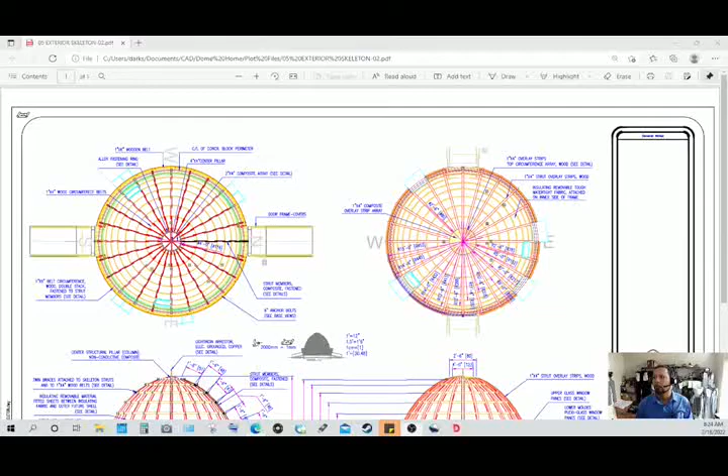Welcome back. I want to begin analyzing sheet number 5. Sheet number 5 is beginning to look at the outer structures.

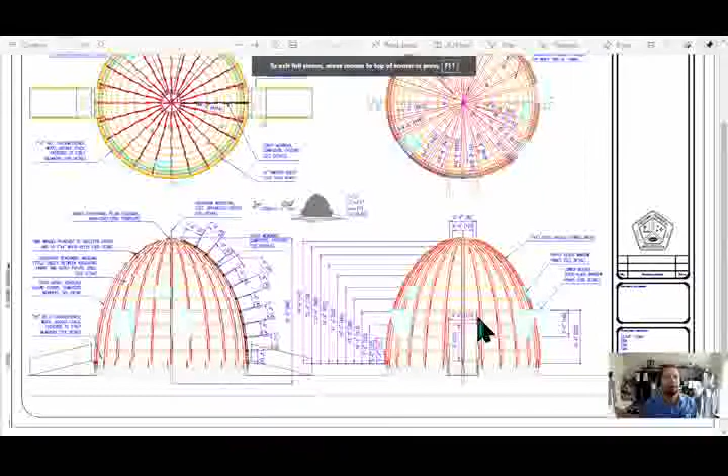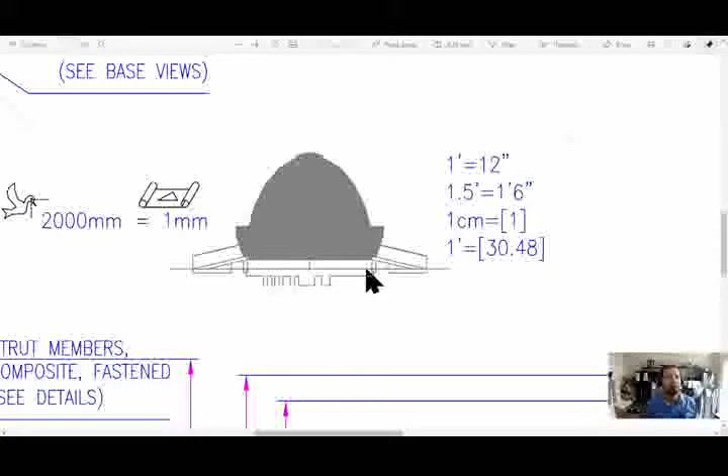The sequence is to look at the base, as we did on the last video, the foundation. Then look at the outer structure, which we're doing on this sheet. Then from there, look at the inside structures. That is the sequence that these plans follow.

It doesn't have to be like that for construction, of course. I believe you have to start with your foundation for construction. Then you can probably move to the inside next, following foundation, inside structure.

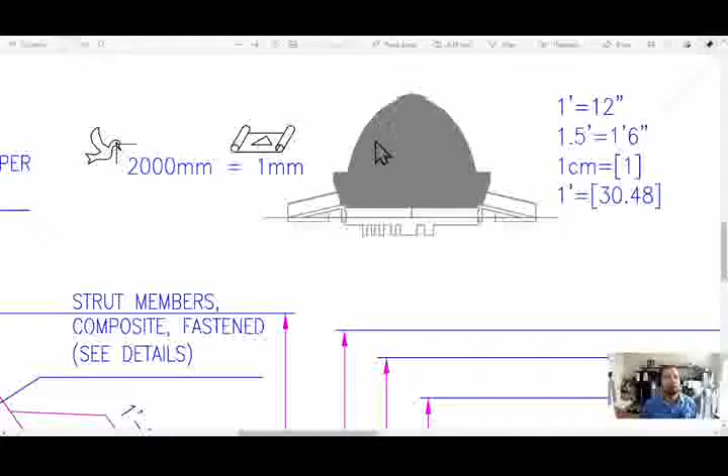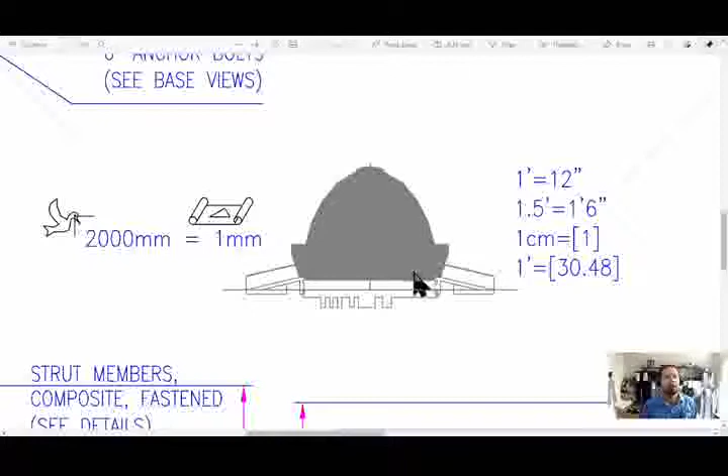The reason why I believe it's a good idea to start with the inside structure first is because the inside structure is self-erecting, or self-sustained. It doesn't need the outer skeleton, the outer structure, for support. So it's self-supporting, so you can use that as scaffolding. You can use the inside structure, which goes quite a ways up into the top of the dome, perhaps more than 3/4 of the way, and you can use that as scaffolding and platforms to build the outer structure.

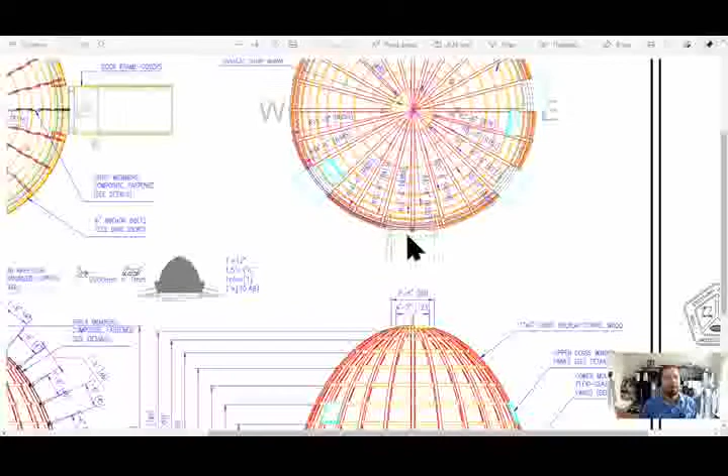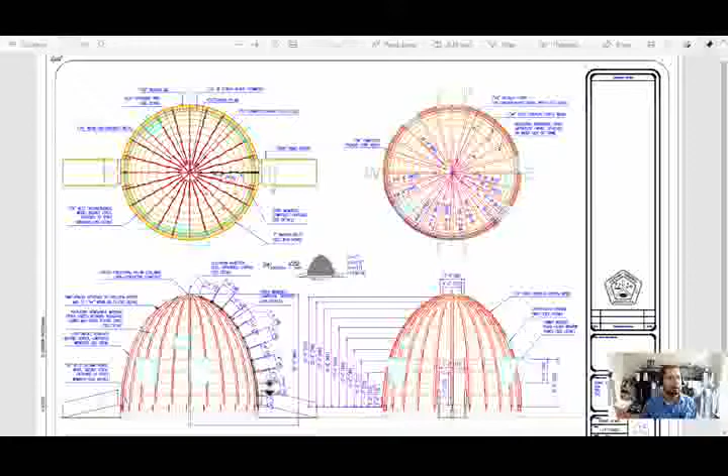But the way it is right now, the base plan is followed by this one. I may change that shortly here in the future, and we'll describe this sheet number 5, which is the exterior skeleton. It's called the exterior skeleton, which is basically the name I gave to this structure here.

This is the exterior skeleton in its finished form. Of course, it doesn't have any paneling or any of the covering it would have as a finished project. But this is the actual exterior structure, as finished, as far as the structure is concerned, the skeleton. We'll go over the various parts as we move forward.

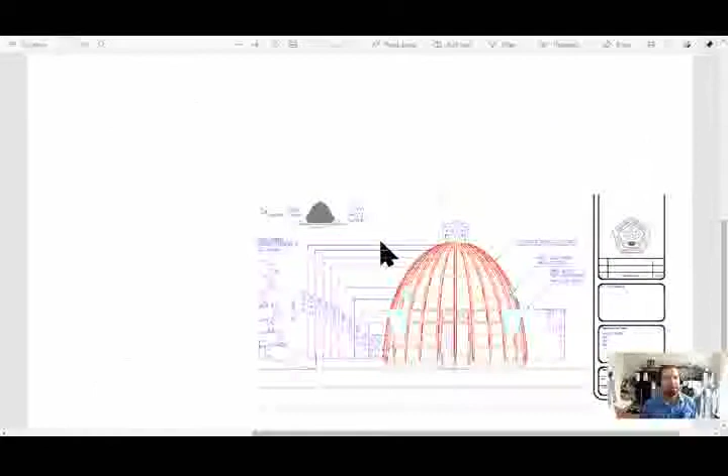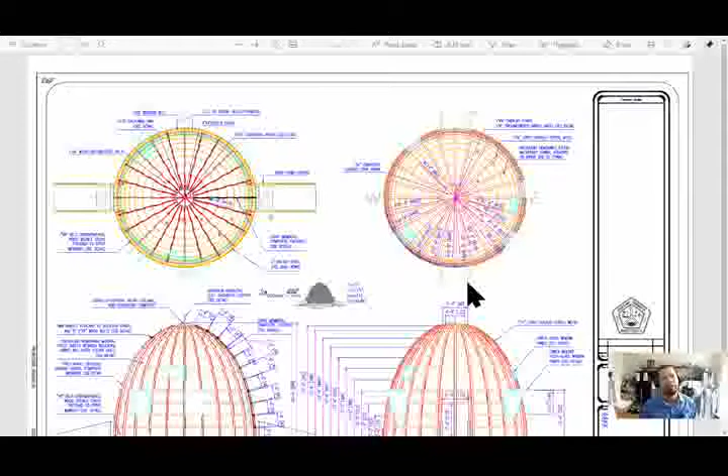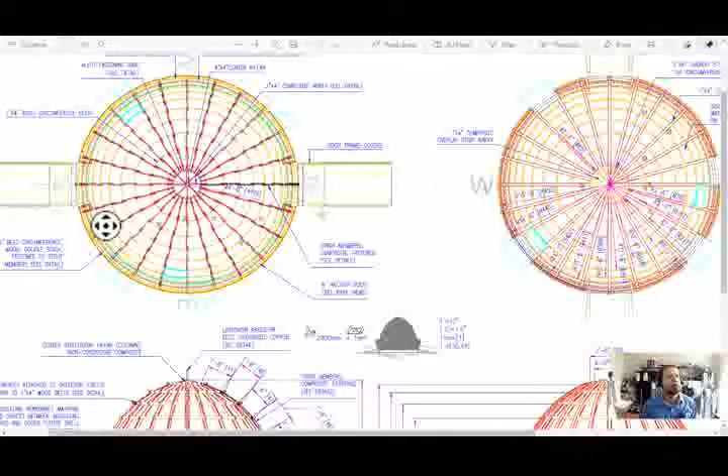We'll begin with this top view. I have again the same layout as the last sheet: 2 top views, one top view from east to west, south to north, and then rotate it 90 degrees to go from west to east. And then this would be south to north. Again, the south side being the entrance, north side being the exit.

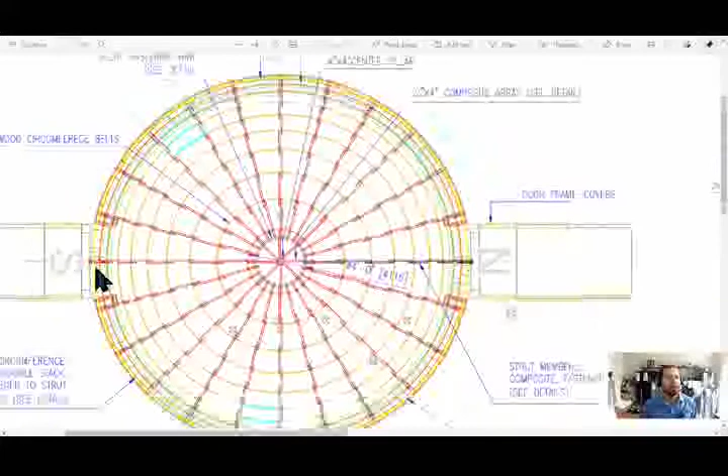As you can see, the structure is sitting on top of this circular block array, as shown in the last plan. And it is basically an array of arcs that go around a common center, being the very center of this one column, this pillar. And as you can see, the arcs are attached in the center by what I call struts.

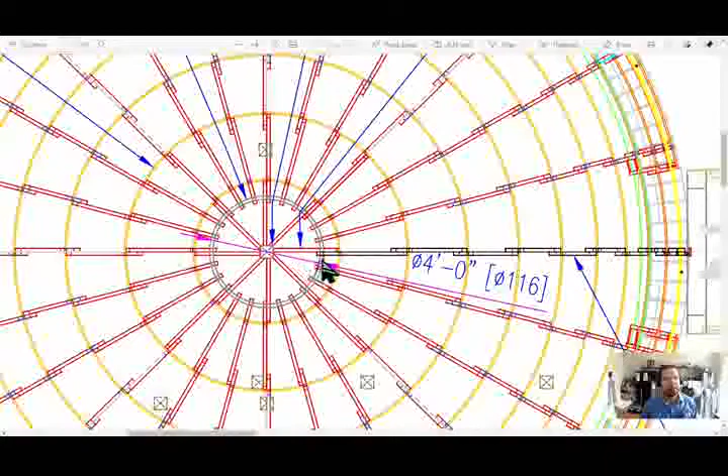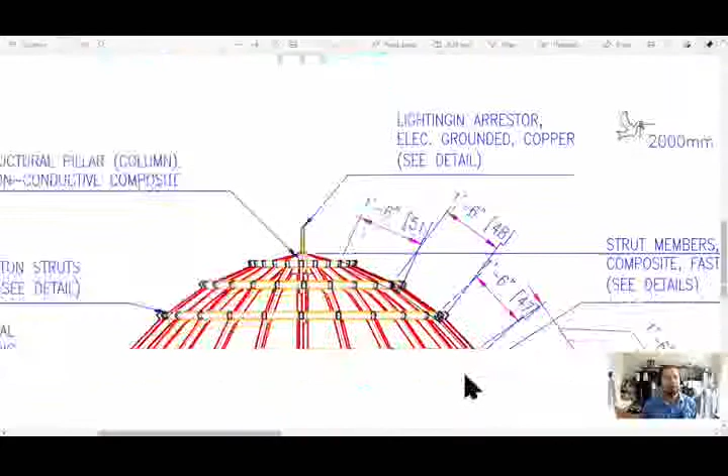These are pieces of lumber, 2x4. They're designed to be the size of a 2x4. They don't necessarily have to be lumber. Actually, these here in the center are designed to be a material other than lumber, like dense composite. And these can be lumber, but can also be composite. These are nothing but different size, cut-to-size struts, pieces of lumber, rectangular in shape. They're not curved at all, each one.

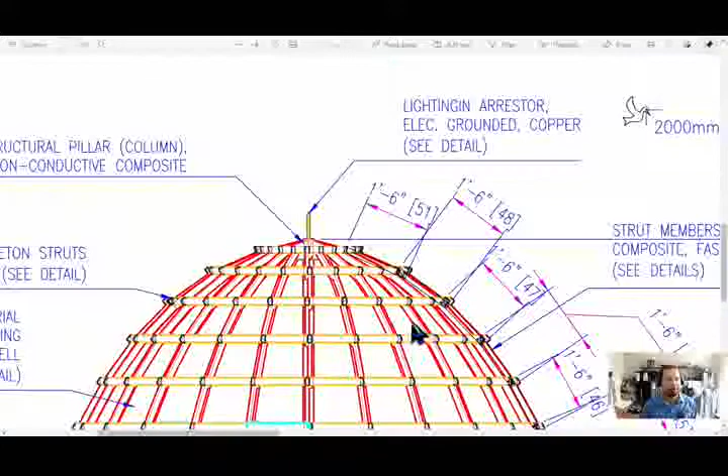These are the dimensions for them, and they are basically put together, arrayed, and attached in a pattern using 4 bolts at each attachment point, as depicted here. There will be another view with a larger, more easily seen pattern for attachment.

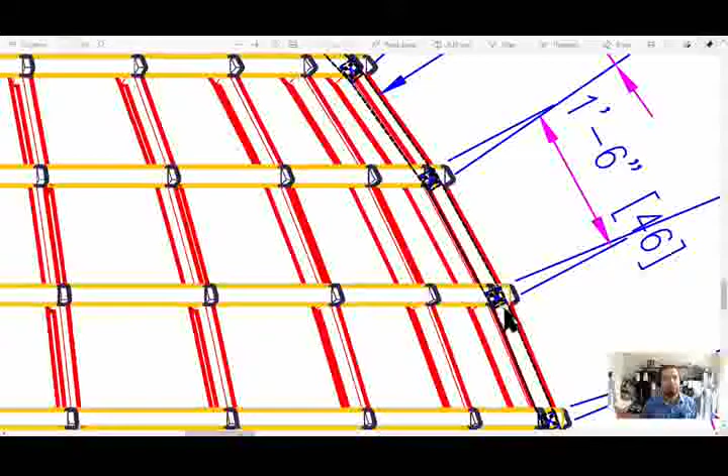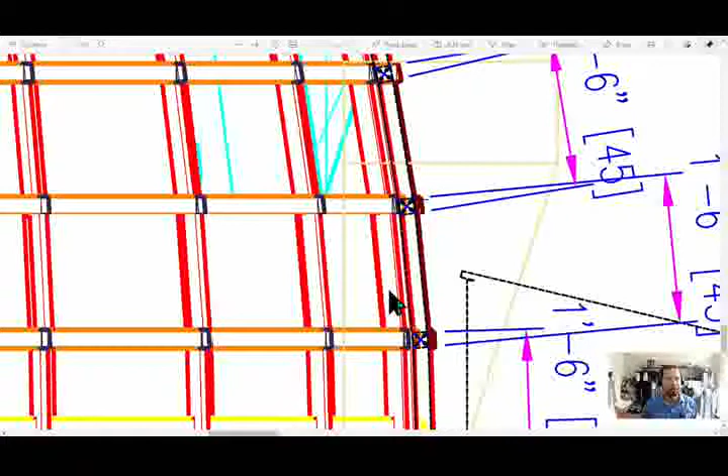So as you can see, these struts, these pieces of material, are rectangular in shape. They're just attached to each other using bolts and perhaps sealant, some sort of cement or bonding paste, for a more secure attachment. And this will be the same for every arc. Every attachment point will be the same.

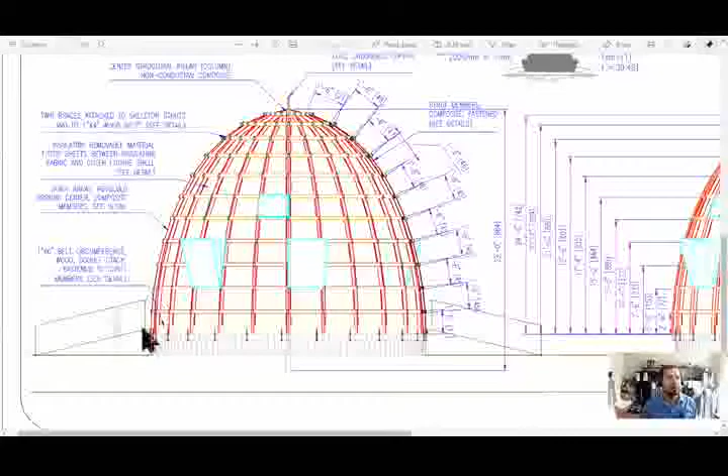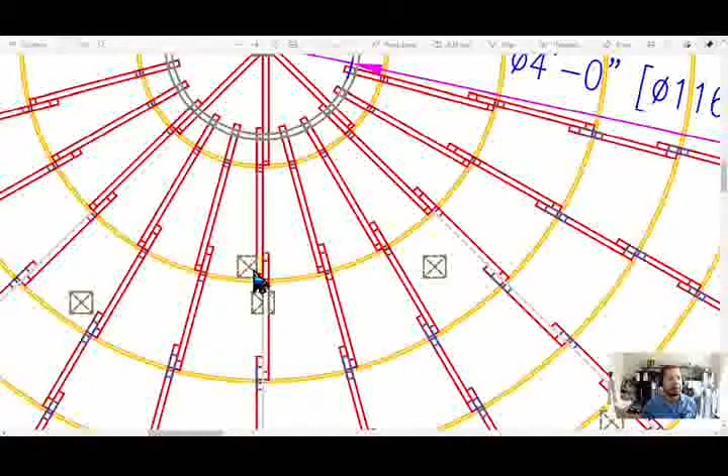Okay, and that is for the arcs. So that is the overall structure of the arc, which goes to the other end as well. As you can see, this arc going from east to west begins here on the base, comes up. It is perhaps supported here and here by these 2 columns.

Then it keeps going here, attached to the center column, and continues. So it is very much separated by this column. These two pieces don't directly touch, but the load is shared with the column for each one of these arcs.

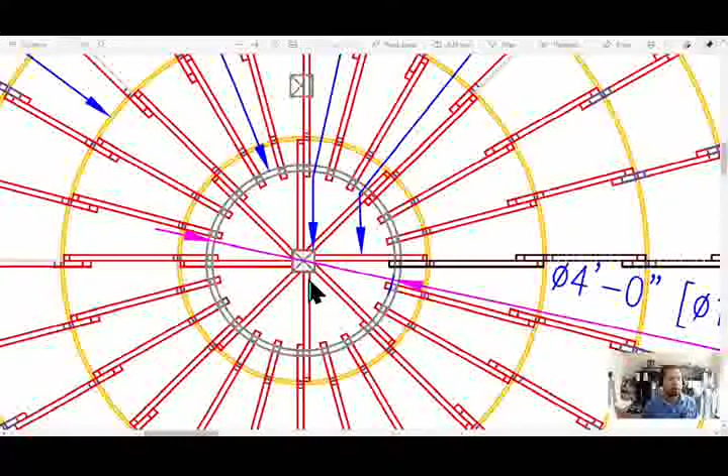It is securely attached to the column using braces and bonding chemicals, paste, etc. That will be shown in detail on how they will be attached, what the attachment points are, and the recommended fasteners to use, whether it be bolts - most likely bolts - or deck screws, or a combination of that with brackets and braces, and of course with sealant or bonding material.

As you can see, these arcs in between, the ones that come all the way to the center column, are cut, or they end right there, like these two. They cannot all come to the center, because that would overcrowd this area, making it impossible, or very inconvenient and non-practical, to attach to this center column. If we came here, it'd be very difficult to securely attach it, especially if you come in with this one as well.

So those two in between will end right there. Only 8 will come into the center. The rest will remain this far, only secured and attached to this alloy metal ring, shown in gray here.

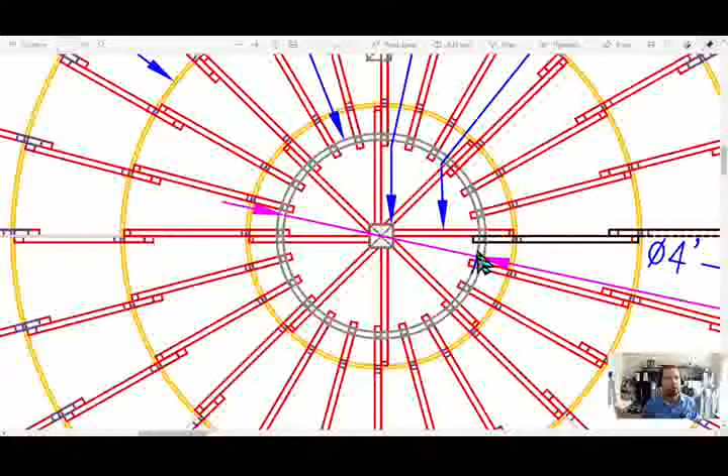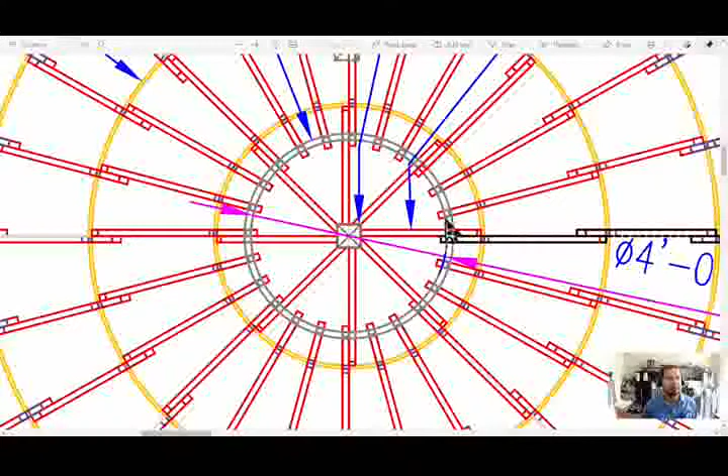This ring is manufactured with a series of cuts and holes to fit and secure every single one of these struts. They will share their load not only among each other, but indirectly they will share the load with the center as well. The load will be shared through these struts that are attached to the center, through the ring, when securely and tightly attached.

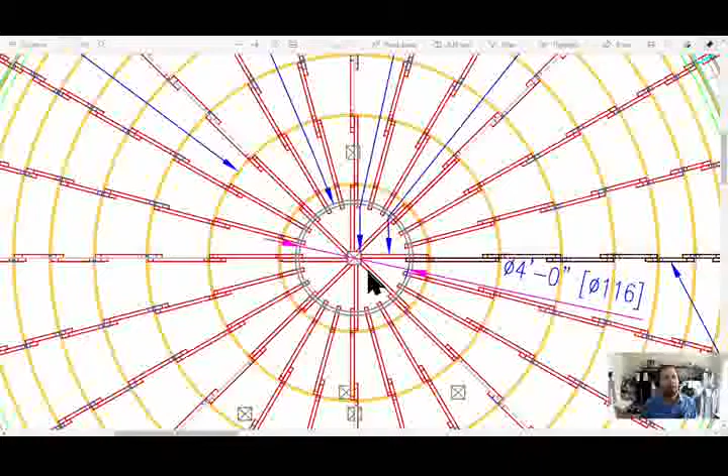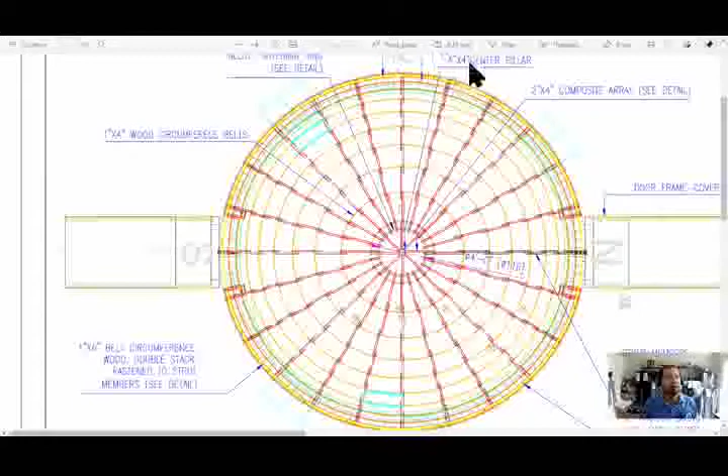I've given dimensions for some of the things here. This is not a 4x4, this is more like a 6x6, or 5.5 inches by 5.5 inches. That needs to be corrected. This dimension here is not correct.

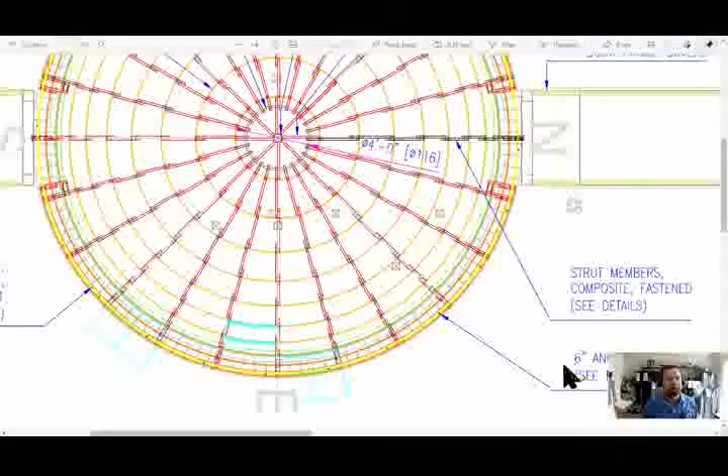Very brief and generic descriptions are given for the structure. You can see the anchor bolts here. They're not 6 inches, they're more like - I believe I said - 16 inches or 18 inches.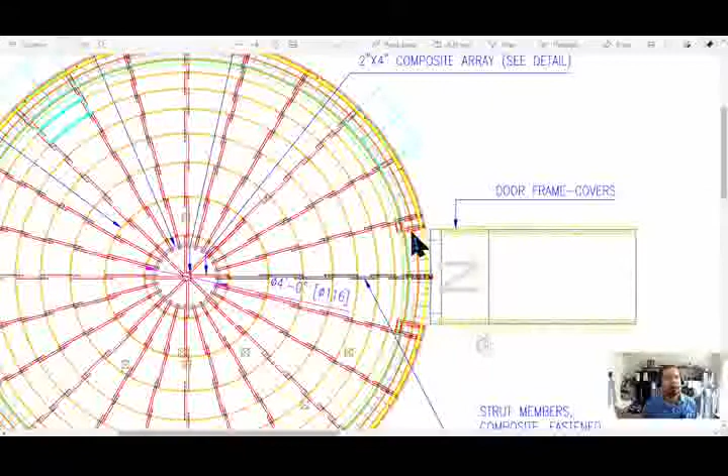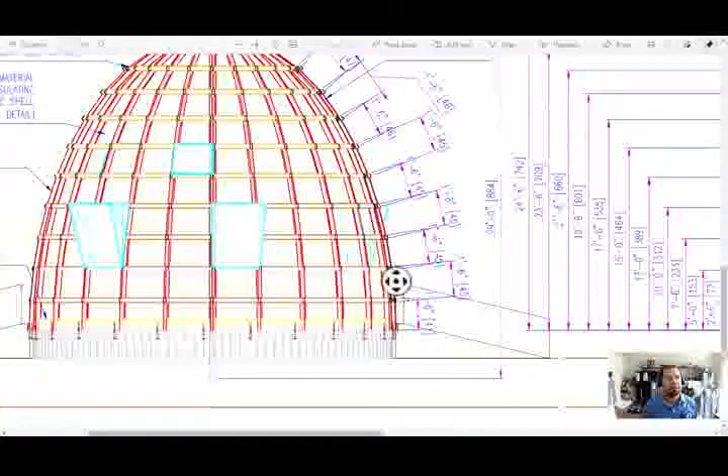Also, these being the entrances, have these extra struts here that go all the way to the top of the first level, or the bottom of the second level, as seen here. Perhaps you can't see those there, but as you can see, there's that door frame that I described earlier.

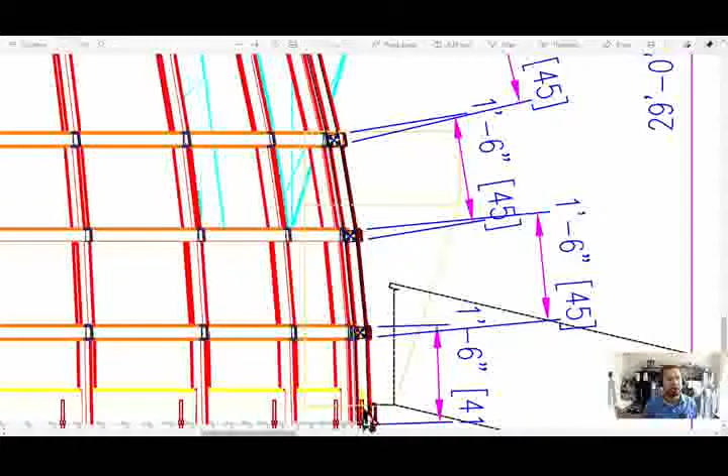It is an entire piece that goes inserted, basically, to put a door here. So there's a double structure here, strut structure that goes 1, 2, 3 struts high.

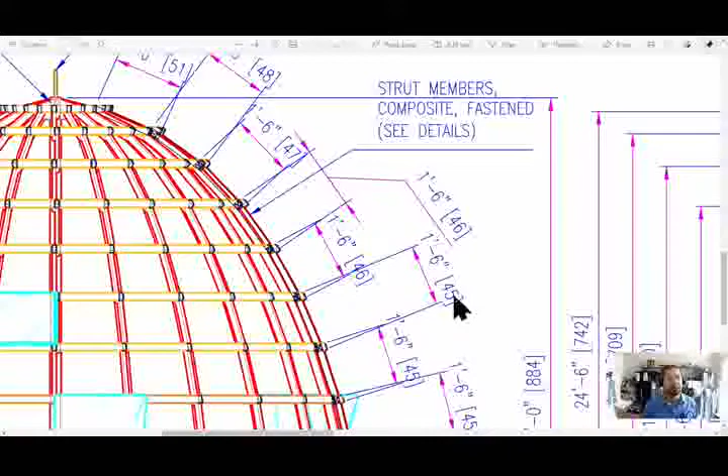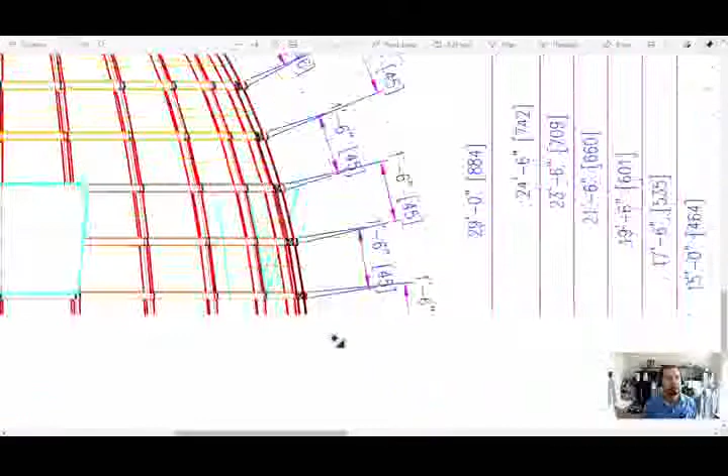Again, I show the dimensions of each strut, very close in dimension, perhaps identical. They show as 45 centimeters, some show 46, 47. I believe these ones are longer. Yes, they're not identical - these are longer, 51 centimeters, 48, 47. This one here is 41. So yeah, I would follow these dimensions.

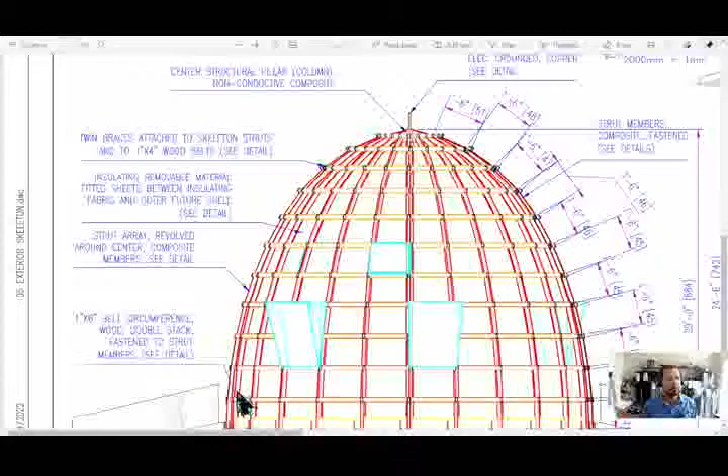Here's a description of some of the major items here. I described the 1x6 belt circumference made of wood. It's a double stack - there are 2 of them, as you can see, one on top of each other.

I'll describe some of the other things, such as an insulating material here, or fabric that goes right inside of that.

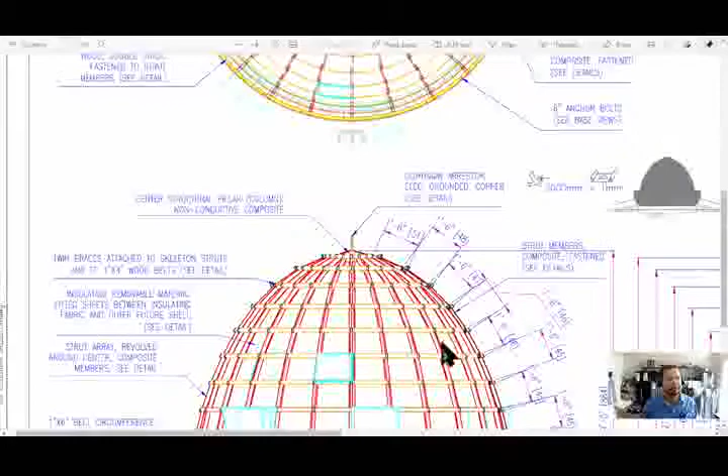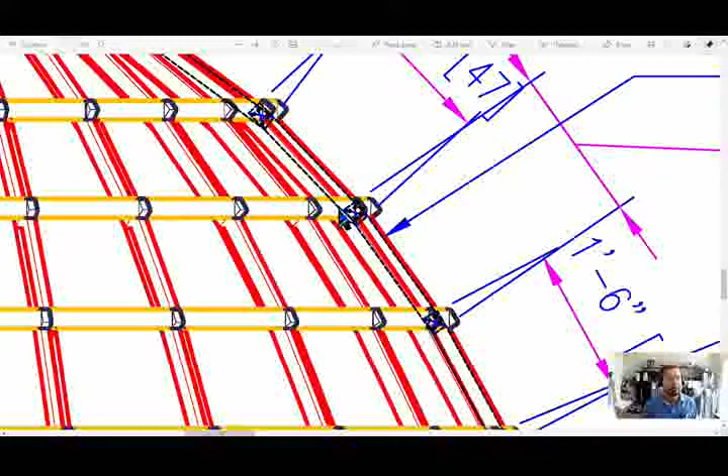And the way these struts are secured, there will be another sheet that shows that with a lot more detail. But just to begin explaining, they are attached to these horizontal belts using these triangles, what I call triangular braces. What these triangular braces do is attach this horizontal belt to the struts at each point, at each one of those locations where they come together.

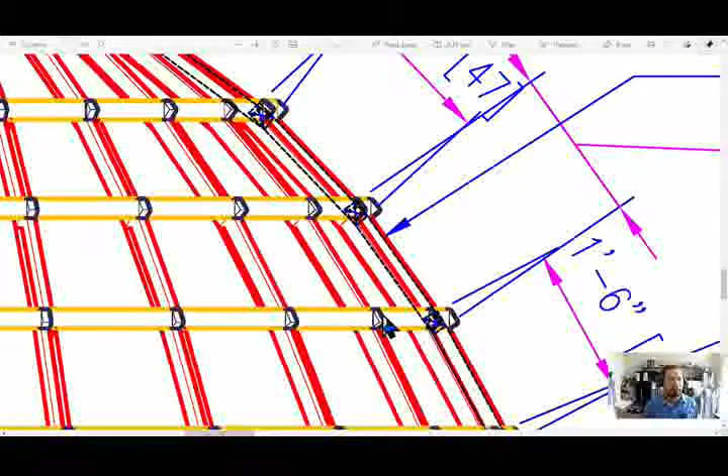They also provide an attachment point for the overlay strip, shown right here. These overlay strips, as you can see, need an attachment point, so they cannot go straight on the strut - they would not be curved like I'm showing them. For that, they go attached at each triangle.

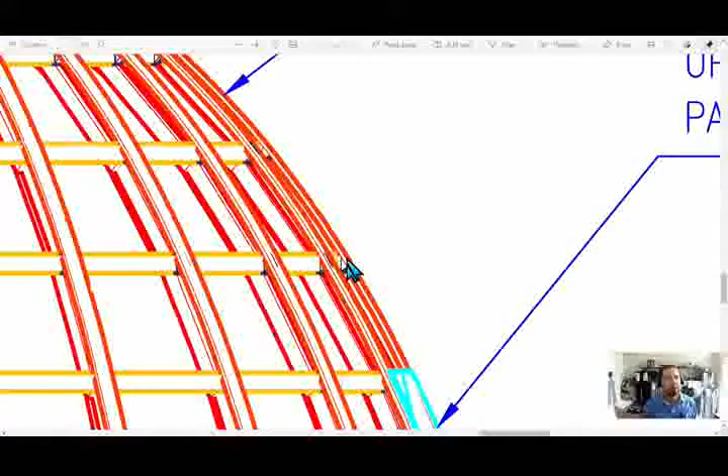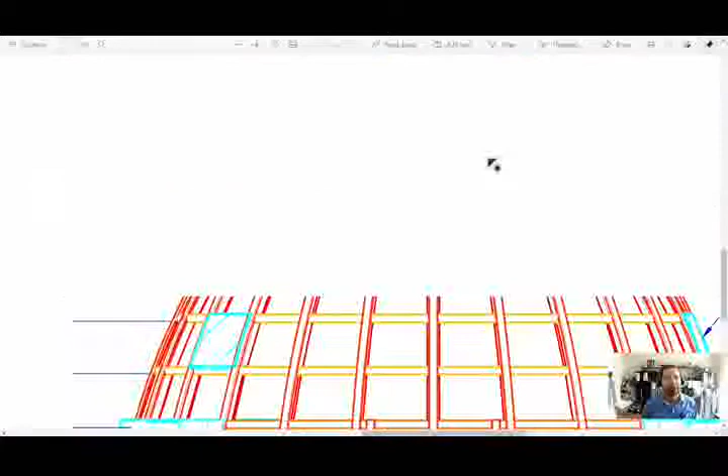Here, here, here, here, there, there, there, and there. These triangles are all of a specific size dimension, which I will detail in another drawing coming up.

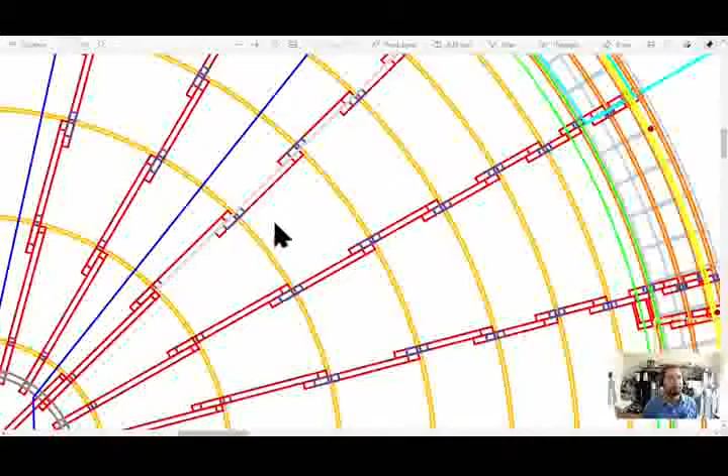Moving to this view, this top view shows the difference between that view and this one: this view just shows the struts and the triangles, the braces. This view here goes further and shows the overlay already installed, and the belts. The belts are shown here as well.

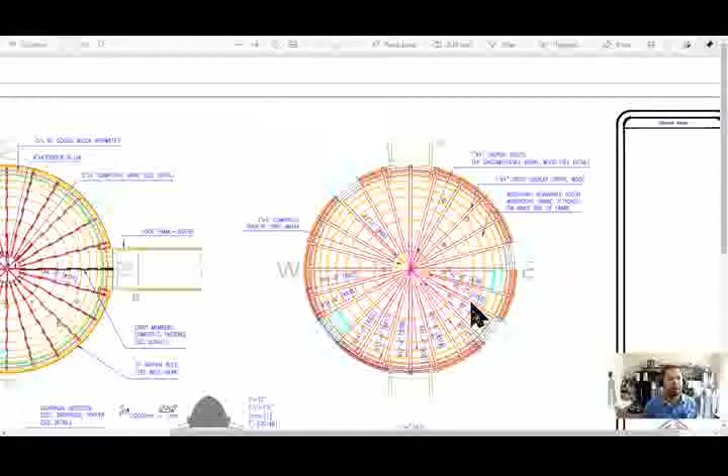These belts each are designed to be of lumber wood, 1 inch by 4 inch.

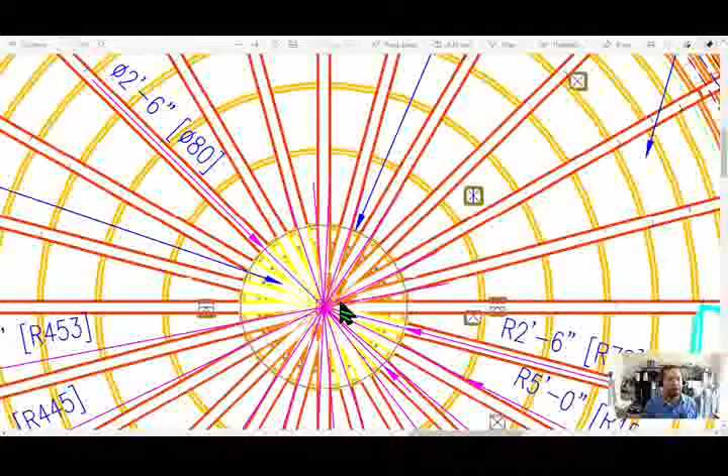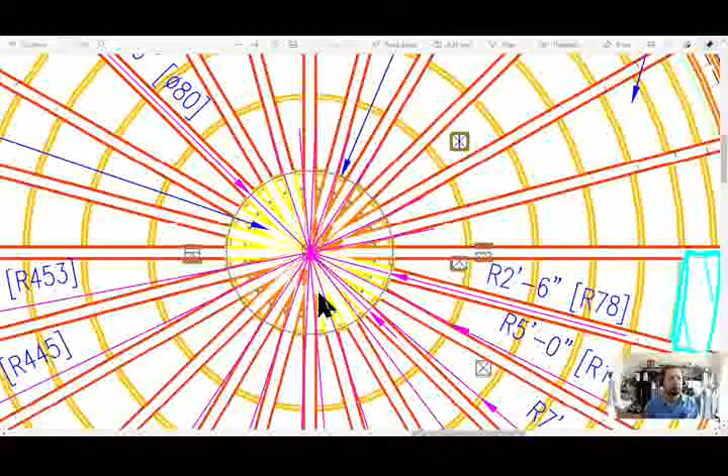This right here is not necessarily a continuation of these, but it's a manufactured cap that has to be manufactured basically to continue these overlay strips all the way to the center and provide a cap that almost perfectly matches to where these come in at.

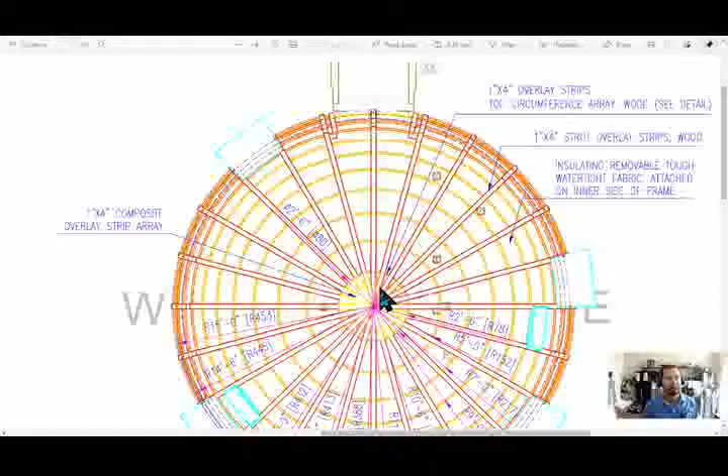I will show that with a bit more detail in another drawing. I do show some descriptions of that. I call it a 1x4 composite overlay strip array.

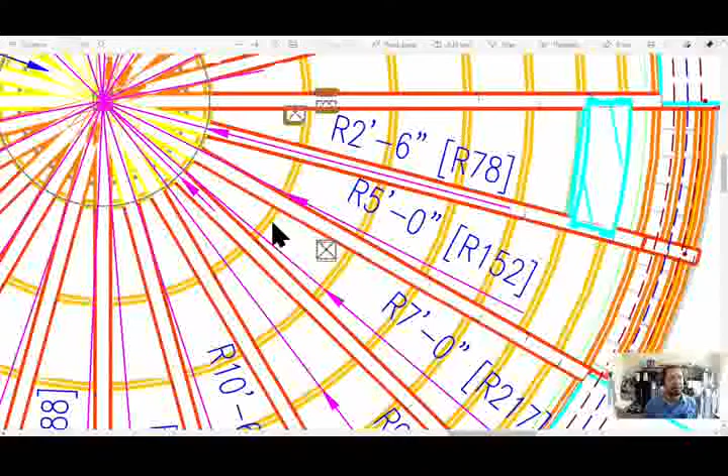I show some dimensions of each of the circumferences, like for these 1x4 rings or belts. I do show the radius for each one of those, radius from the center, which would be the center of that column.

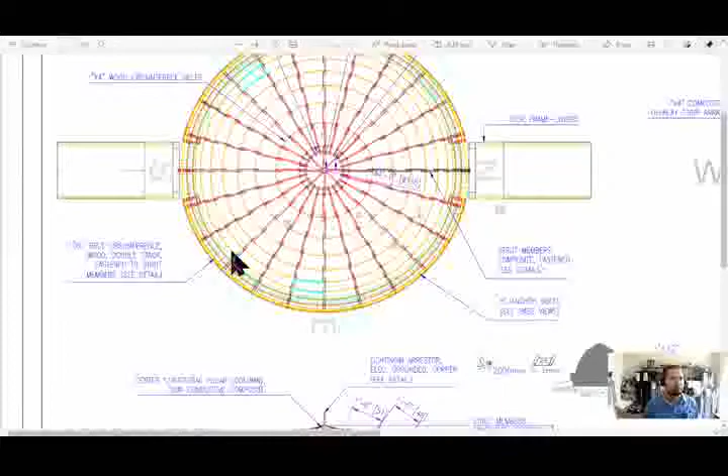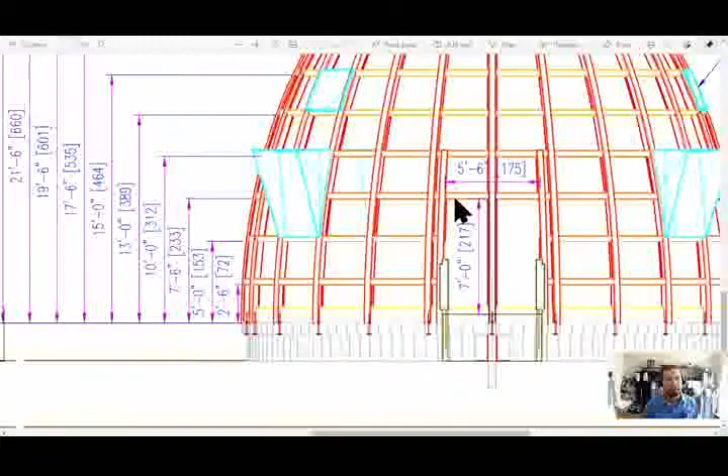And those are the main dimensions. Also, I do show the heights to each one of those, to the bottom of each one of those belts. These 1x4 belts, I show the heights, the height to there, which basically is the height of the door frame.

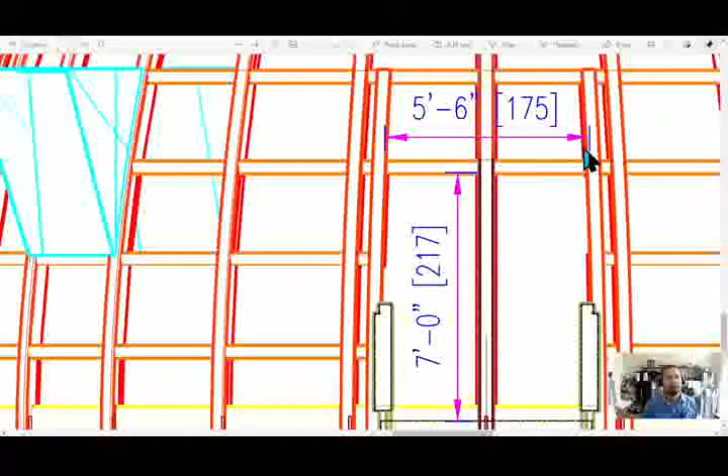And the width of the door frame, which I believe, this may be mistaken, I believe that to be about 6 feet, if I'm not mistaken, but it may very well be different, so we'll have to verify that.

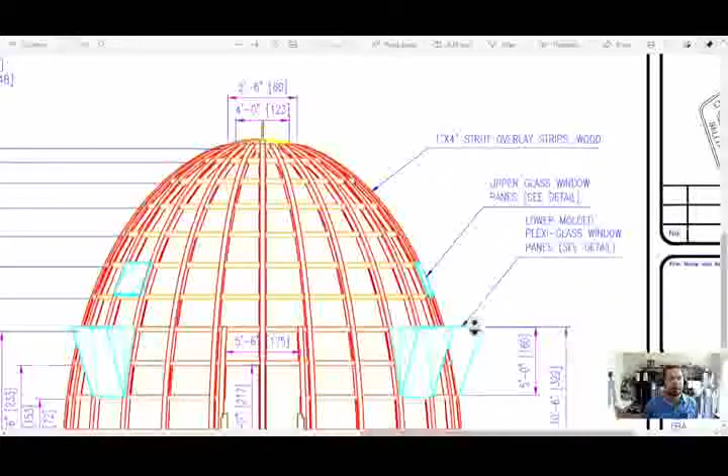Some more dimensions given and more descriptions, including the window pane and the window here, which again is designed to be molded plexiglass. This is designed to be glass.

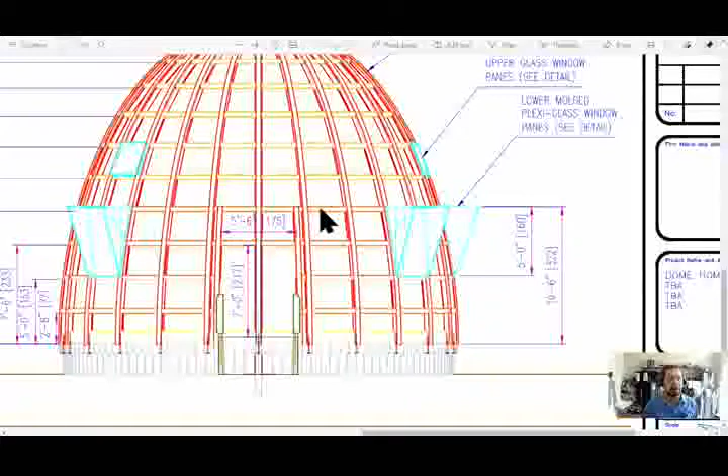The height of the window is 5 foot. The height from what I believe to be the block, the top of the block level, to this is the top of the first deck, first level.

Again, the top of the blocks is not the floor line. The floor line is about 6 to 6.25 inches up from that, probably about the line where this is right here. That's the floor level.

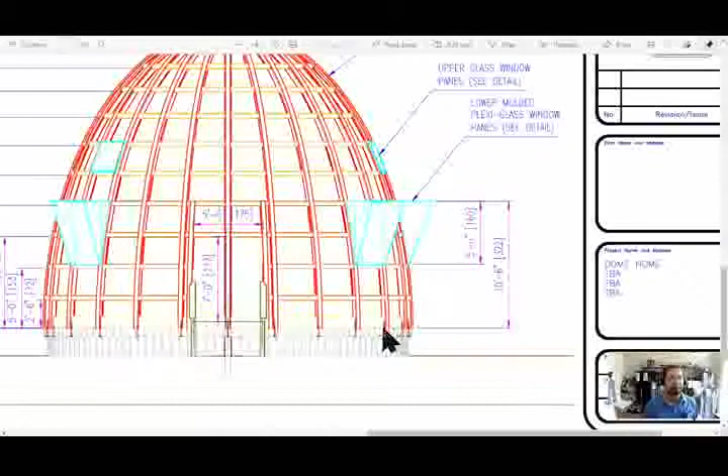Again, showing the carriage bolts here that support, that maintain the curvature for that steel belt—excuse me, that wooden belt, double stacked belt.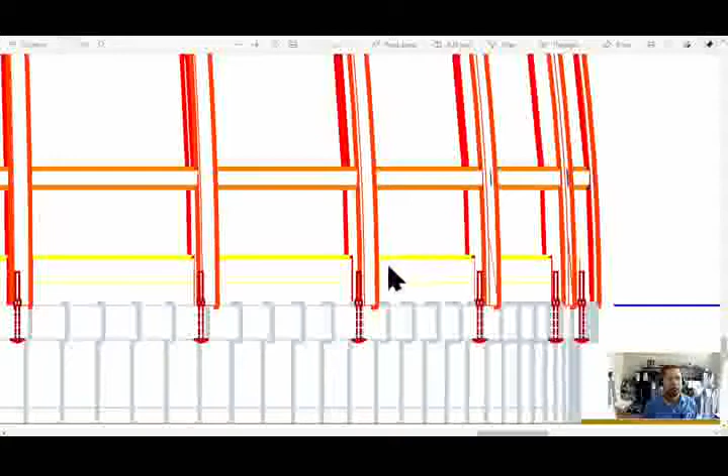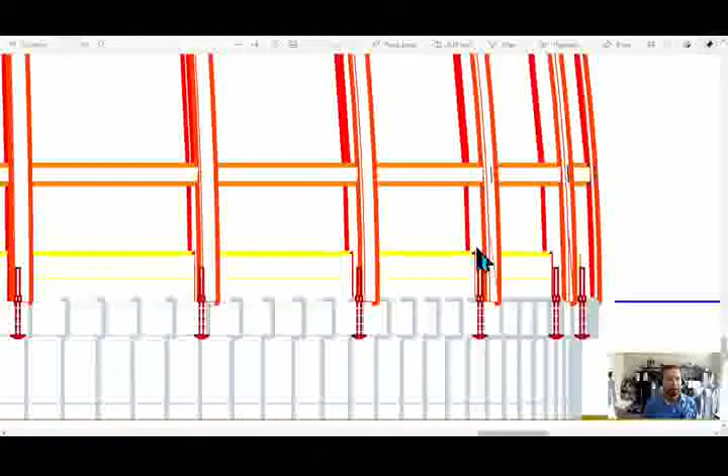And the belt, what it does is, again, it holds on. There's a slit here cut into each one of these struts that nicely and snugly fit into those two belts, and these belts hold the struts from spreading out, because by gravity the natural tendency for these struts is to spread open outward, and what that does is basically prevent that, holds them in place.

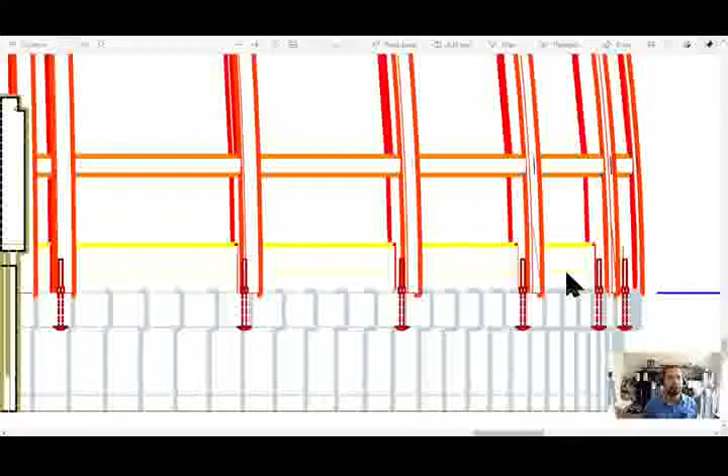The ring itself will do the job, but these bolts will further provide that counter force, counter push, preventing it from spreading.

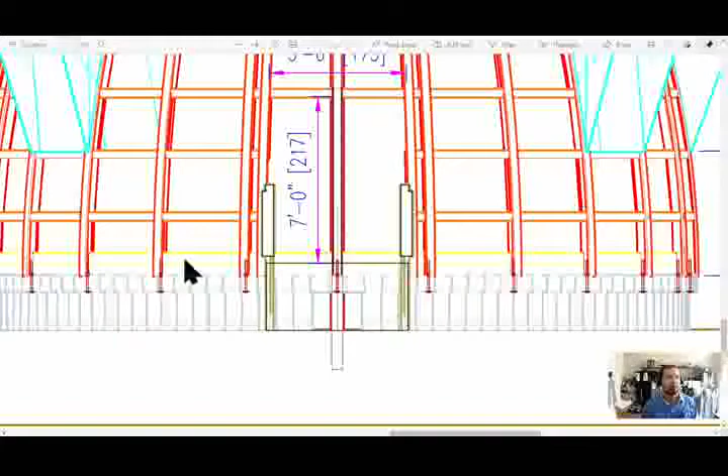Even if these are not a whole piece—of course that's not going to be an entirely whole belt or ring, it will need to be split in various locations because of the nature of the material used, lumber, or even if it's any other material, it is doubtful that it will be an entire belt or ring. So that also provides a way for that ring or belt to maintain its shape through the years.

And that, my friends, is sheet 5. We'll leave it at that. Do go over it, read every description.